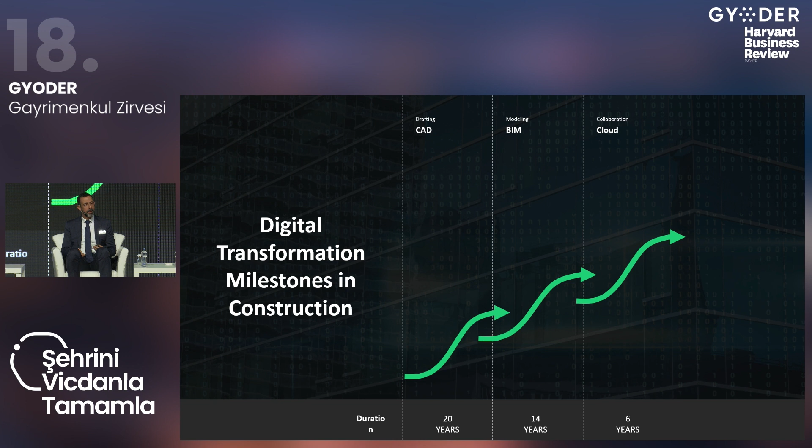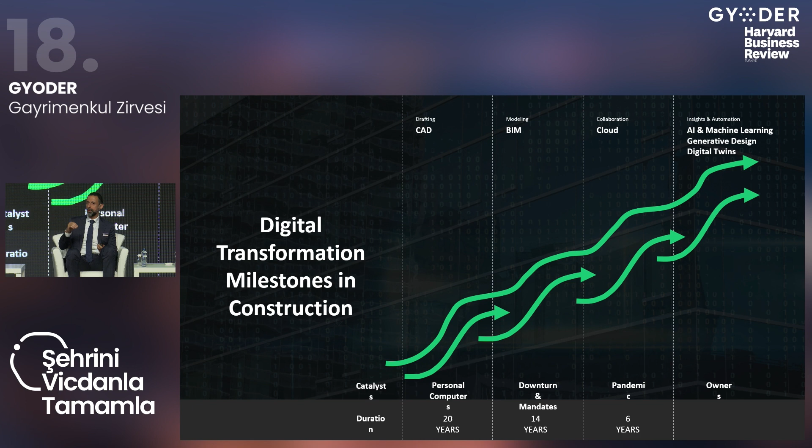And finally here, what we're seeing now is what I call the age of insight. So we generate a lot of information, but how can we do better decision-making from that information that we generate, right? And throughout the process, we've gained incrementally more benefit. And each phase had its own catalyst. So the move to CAD was facilitated by personal computers. Move to BIM was the 2008 downturn and then the BIM mandates. Funny enough, the pandemic accelerated the use of cloud, and now owners are demanding better insight based on data that they have from the design process.

So they warned me against doing that, by the way.

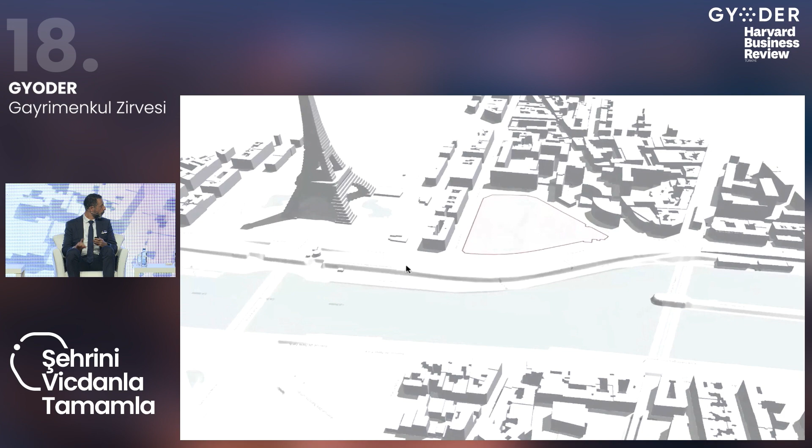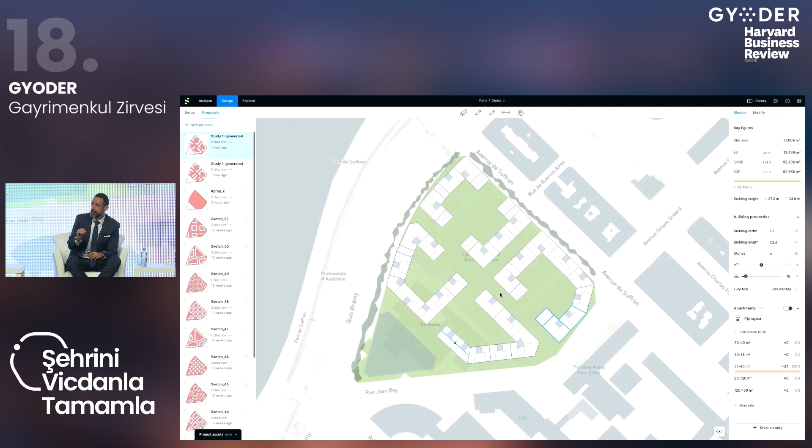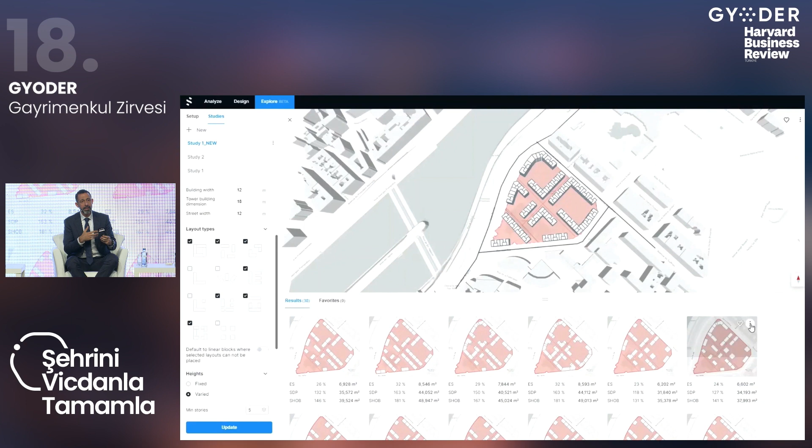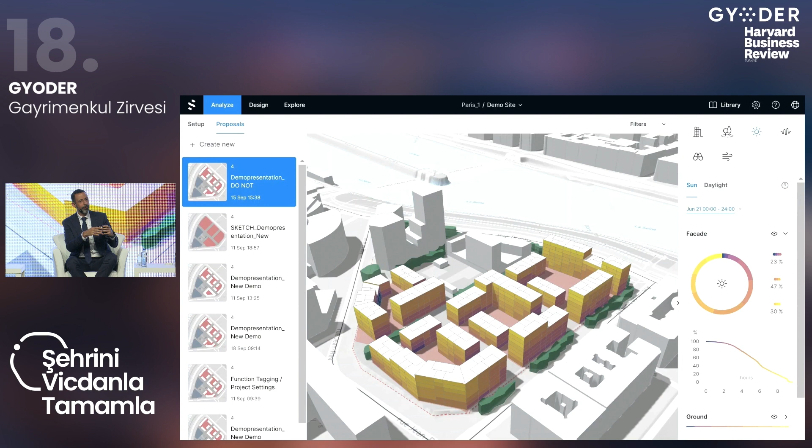One button. So what you see behind me is insight, right? What you see behind me is an algorithm looking at a plot of land and evaluating that plot of land for things like the number of units, the rentable areas, the green areas within that community, and it all happens in context. So in this example, this is a real plot of land next to the Eiffel Tower that is being evaluated. And instead of one person doing one analysis on one option, what you see is an algorithm giving you tens of thousands of options in virtually no time, right?

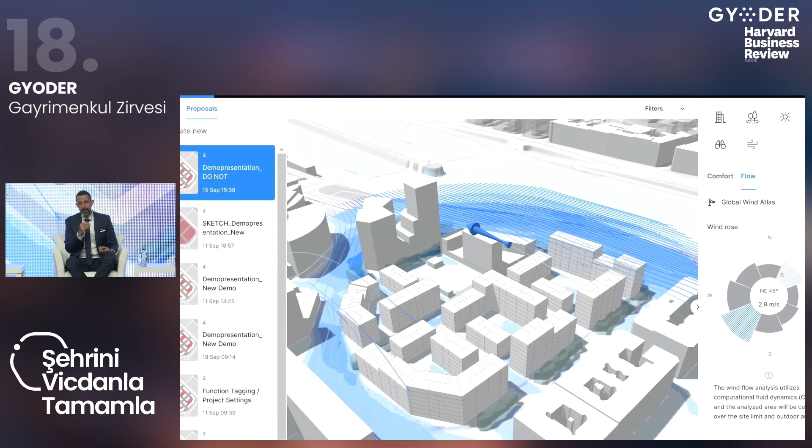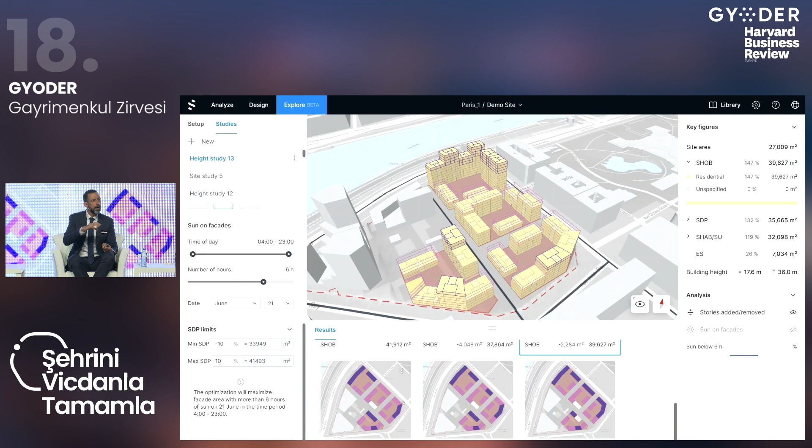Those algorithms are now loaded with things like artificial intelligence, predictive analytics that can intuit results. So instead of doing a computational fluid dynamics simulation of how the wind flows, that algorithm can actually give you a very good first guess and take you directly into that decision-making mode. So this is the age of insight. This is not common practice across the industry now, but this is what you can expect to see happening in the next few years. We see some adoption, but it's certainly not the norm.

This is the norm. It's digital project delivery. In this case, I'm talking about Red Sea Global. So if you read a bit about the construction industry, the single largest construction opportunity now is happening in Saudi through the Public Investment Fund projects. Red Sea is one of the projects that are being managed there. This is a $16 billion project over an area the size of Belgium, right?

Massive, massive development. What's interesting about this real estate owner is that they said, I want to own the data from the beginning, not just the assets. So everyone in their ecosystem actually goes to their environment through the cloud. They do the modeling in their own environment, and they get out at the end of the day, which means that someone like Red Sea retains that knowledge, retains that information.

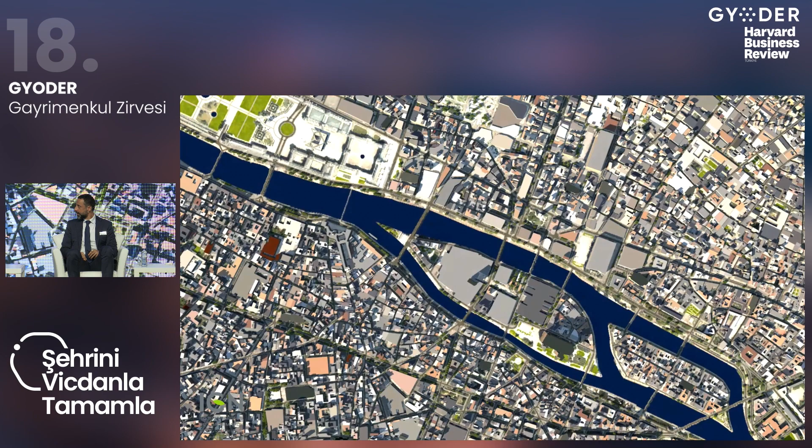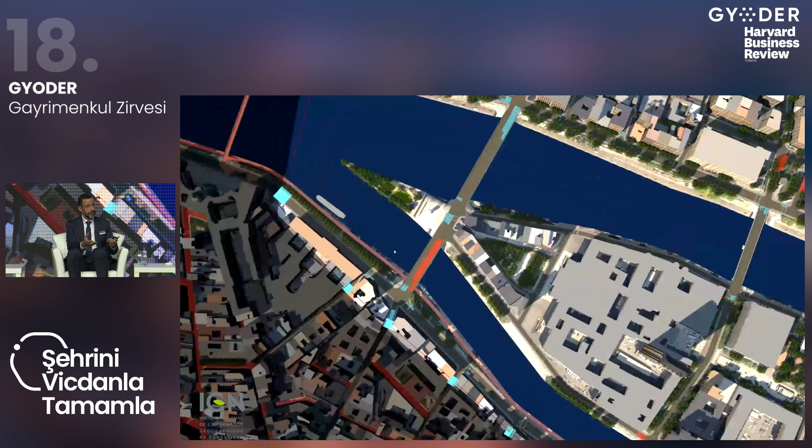And I want to close with just a quick video going back to Paris. We work a lot with the city of Paris. This is a simulation that is being run citywide. So now insight is not just on a certain building or a certain community. It is citywide. What you can see is a traffic simulation with real-time data coming from sensors into this model that can actually look at where bottlenecks in the system are and advise the designers to take corrective action. That corrective action can be diverting a certain traffic route, or it could be on the next construction project doing something differently to cater for that environment.

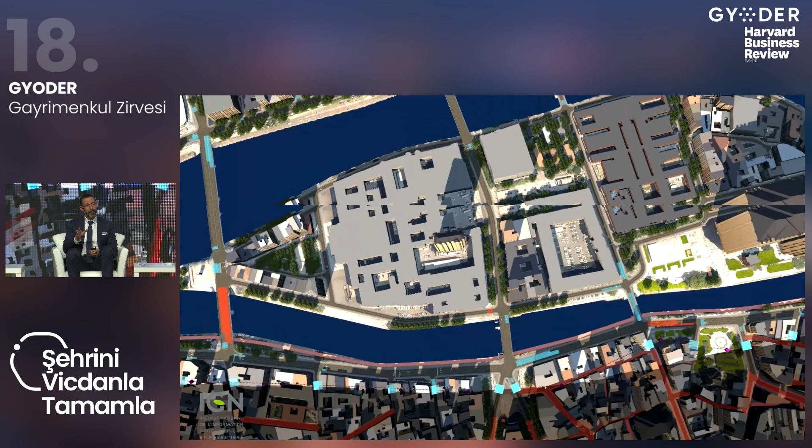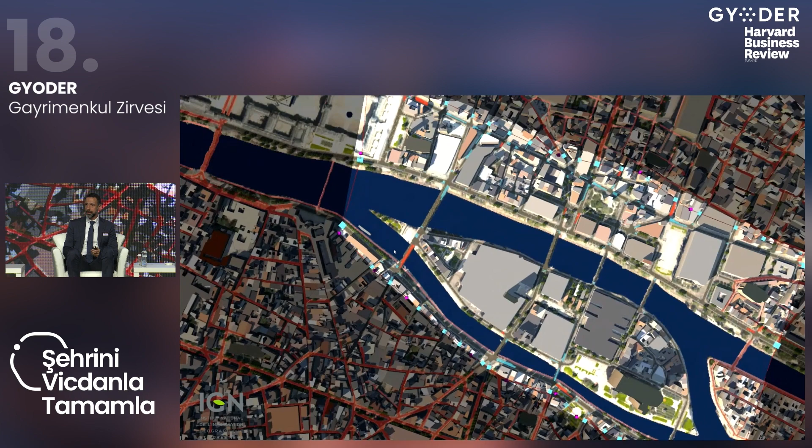So I just wanted to give you a brief overview of where things are in digital transformation now in the industry. And there's a lot of talent here. I've seen it with flagship projects like Istanbul Grand Airport, like Metro Istanbul, which are quite advanced at a worldwide level. You do have a lot of excellence in Turkey, and it has always been a pleasure dealing with those projects. And again, we do have a large contingent of very talented people in Turkey. Any way we can help you digitally transform, please do let us know.

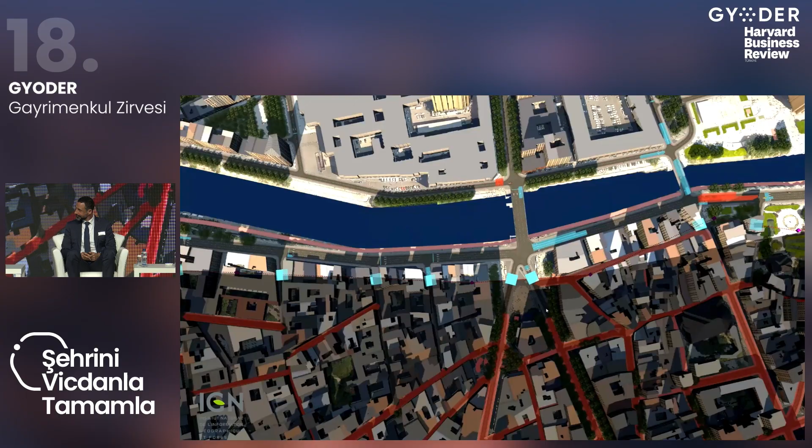Excellent. Naji, thank you very much. I think it's quite interesting to see that sometimes we're maybe too pessimistic and say, oh, we could be much further down the line in digital transformation. But what you're showing us is that a lot is available already, and maybe it lacks a little bit of awareness and hence adoption. And there's a lot of work done as we speak on many fronts in the industry, for sure.

And so I want to come to Bernhard. You represent Progress Group, or Green Code to be precise, which is part of Progress Group. You're in modular construction. You've got a lot of experience in BIM, but you'll probably talk more about the angle of actually realizing what is being designed.

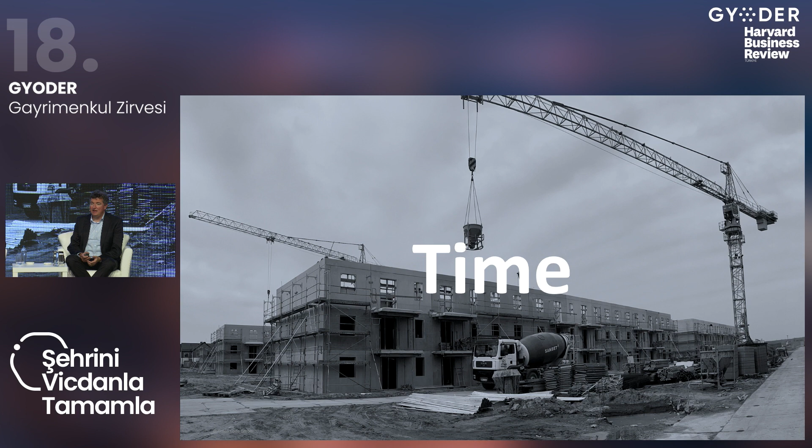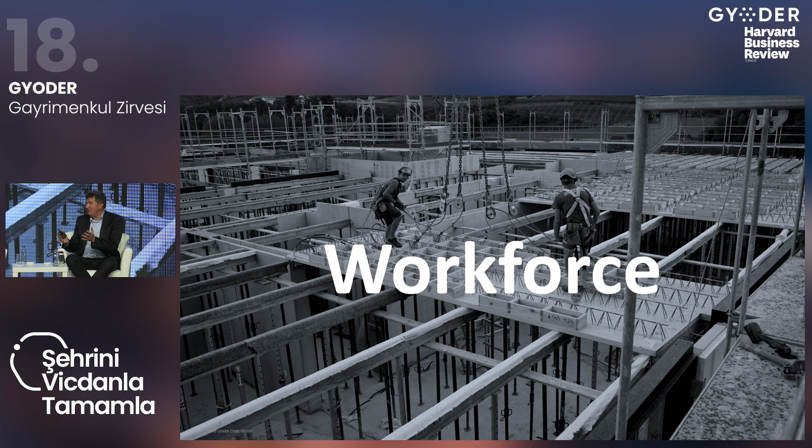But the next issue that the industry is facing is capital. Everything needs to be cheaper. It needs to be more effective, more productive, and it needs to be realized in a shorter time span. This is the challenge that we are facing. And last but not least, here in Turkey you still have a lot of workforce, but in the rest of the world, especially in Europe, we do have a huge issue with the available workforce.

And the ecology is something which comes from that, the sustainability. It's something that we've already heard today: we need to sustain and have a building system which sustains us into the future. And therefore, I try to answer these questions a little bit in the next couple of slides and how this is possible.

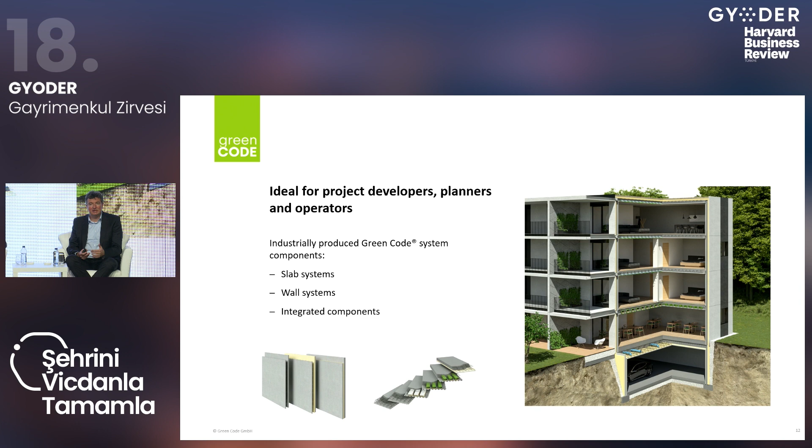But as I've already told you before, it's produced automatically in automated production facilities. Here is a short example of an automated production facility. This facility is in France, where a very few workers are actually creating thousands of square meters of finished product every day.

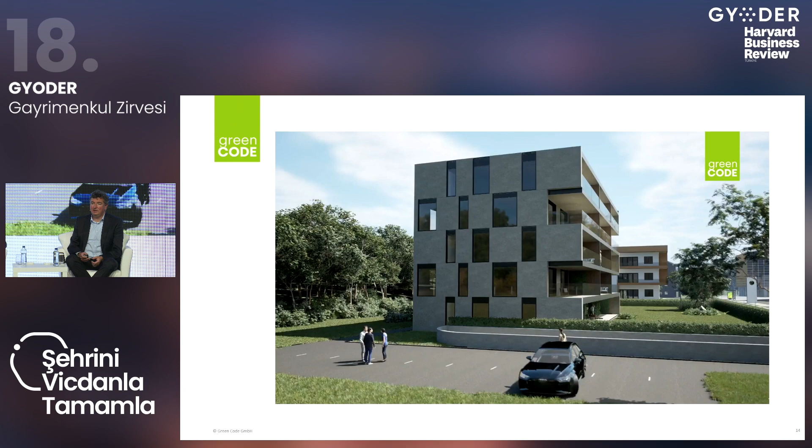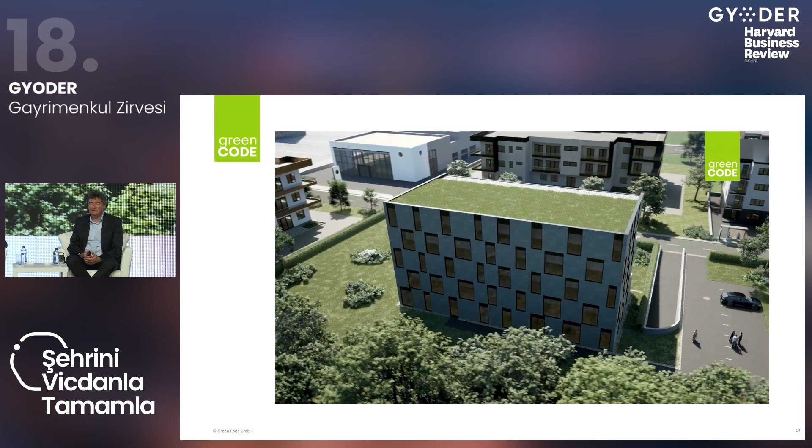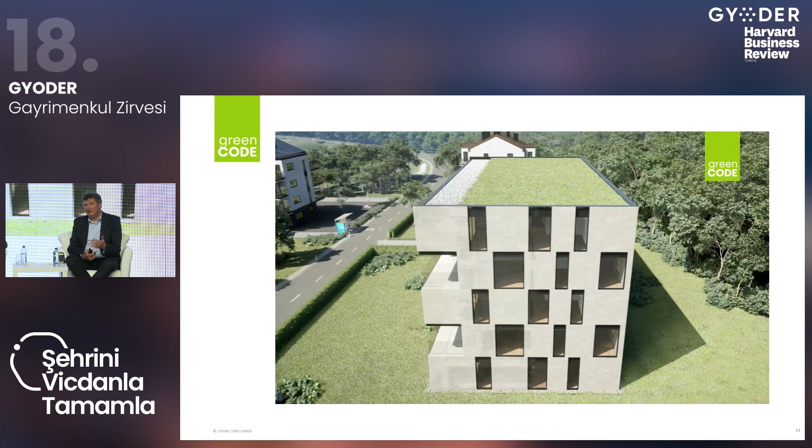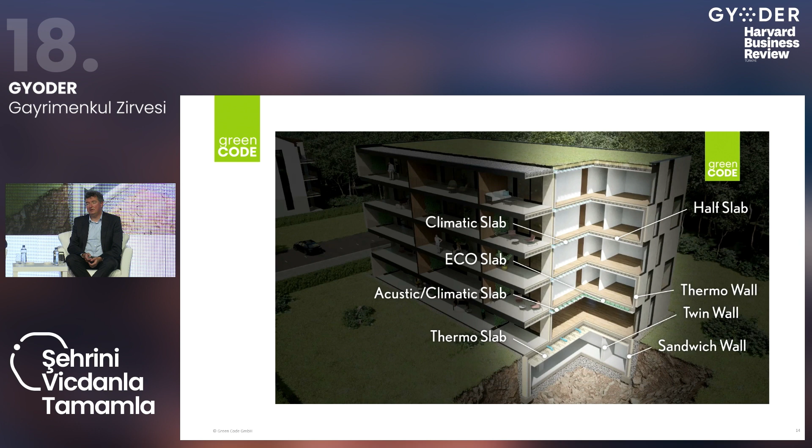So here is a short video which explains the building system a little bit better, where you see the different types of walls. We are hugely advocating green roofs to improve the overall thermal efficiency of our buildings, and then having highly insulated walls on the outside to reduce the amount of heating and cooling required, and then different kinds of slabbing solutions depending on the use of the building and the usage of the part.

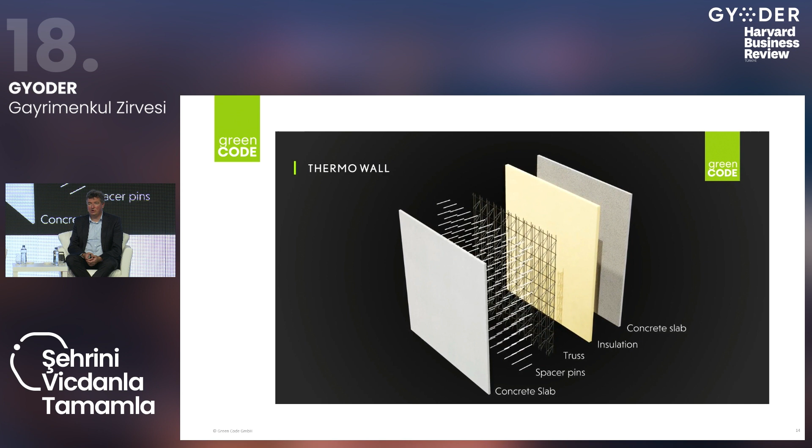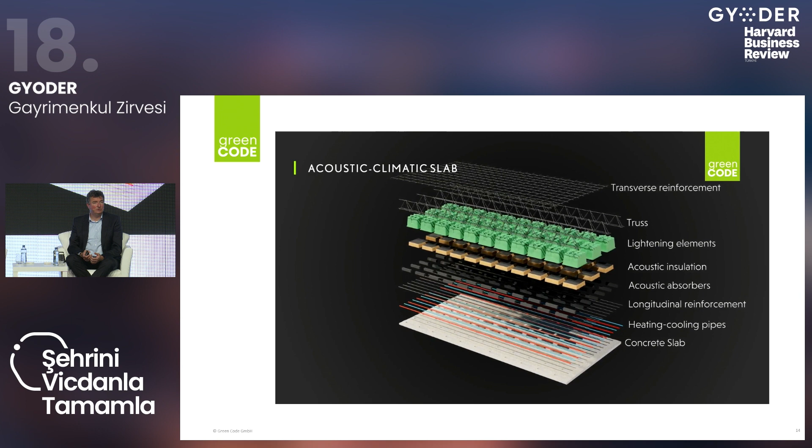Here you see an example of an insulated walling panel, which is automatically produced in a factory. In an explosion view here, you see the insulation part and the two concrete slabs, which are working together. And then with the infill concrete, you're creating a monolithic building system. And here is the same thing for a slabbing solution, where you have the acoustic optimization and heating and cooling directly integrated into the slab. So this was just a very short technical outlook on what we're doing here.

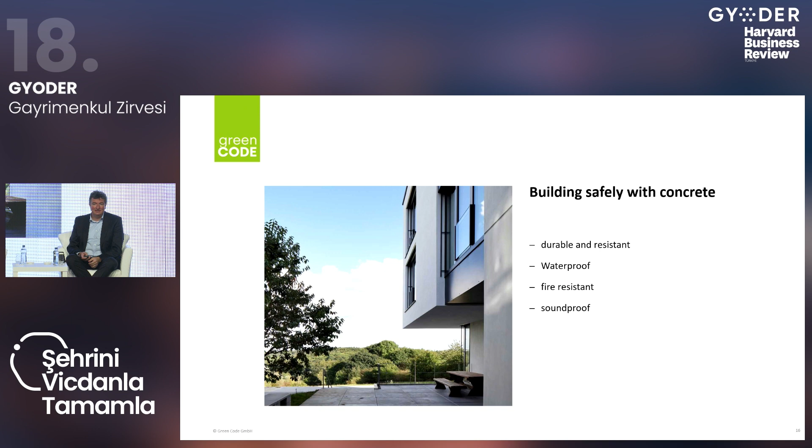I want to show a few more examples, because here you can get a look and feel of what is possible with the solution. Here we see a hotel building in Bad Gastein. They just opened this building, so I still have some pictures from the construction site. But it's important that this was also on a fault line. It's not the same fault line as in Turkey, but still it is in a seismically active area, and they used the system. And why did they use the system? It's just because of the rigidity.

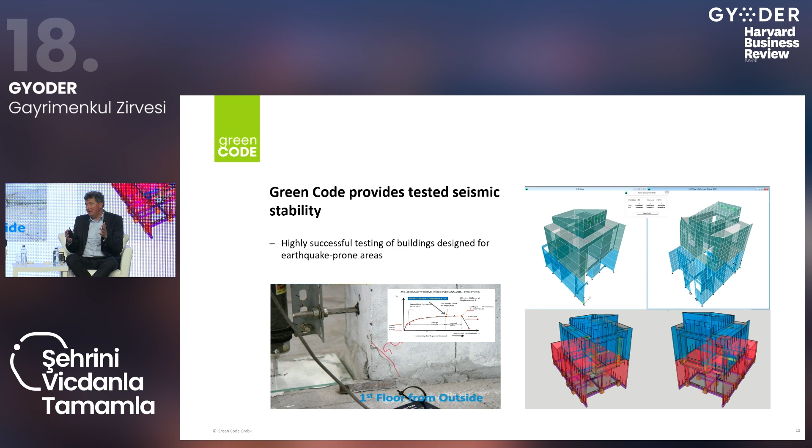Here we did a test with the University of Milano, just to make sure that this system has structural soundness and can be used for seismic stability. It's very rigid. Through this being a monolithic building system, it is very, very rigid in total. And what you can see here is the deformation of the building, the actual building that we've seen before; it can be quite active, and through the monolithic core, it can deform and stay quite in shape.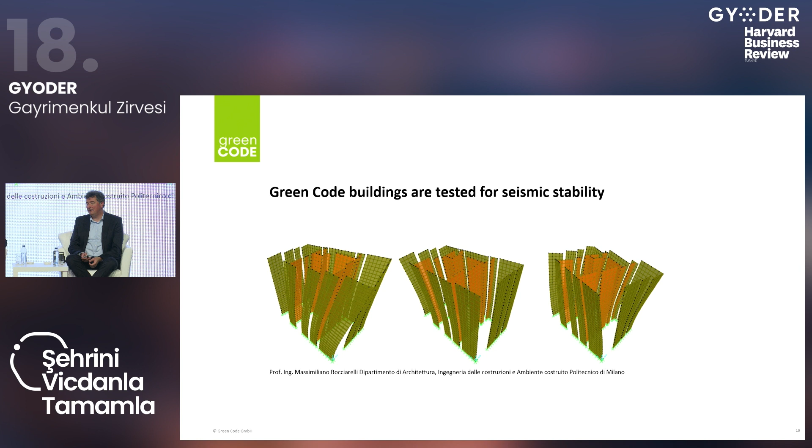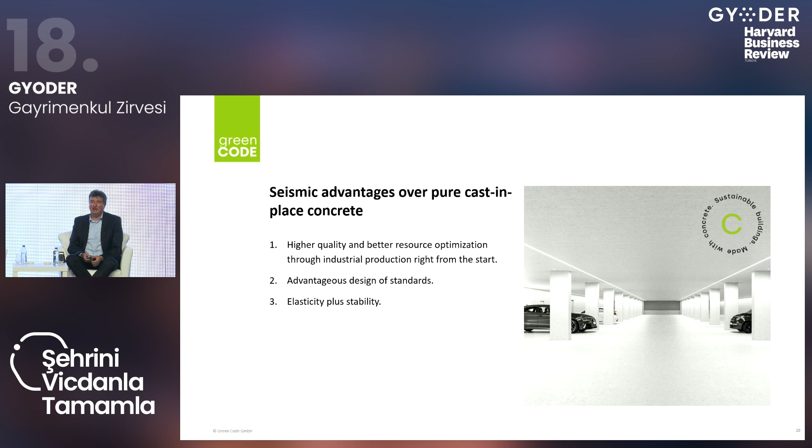This is just to demonstrate that even in seismically active zones, this system can be used quite easily. Therefore, it has been adopted also in China. A lot of the active zones in China are actually using this type of building system more and more. And you have the standardized quality, you have the advantages of design standards, of being able to create anything that you can envision in an automated and industrial way.

And it has to be cost effective. If it's not cost effective, then it's never going to be adopted by any region in the world. And how can we say that it's cost effective? It is that you can reduce the time span on site.

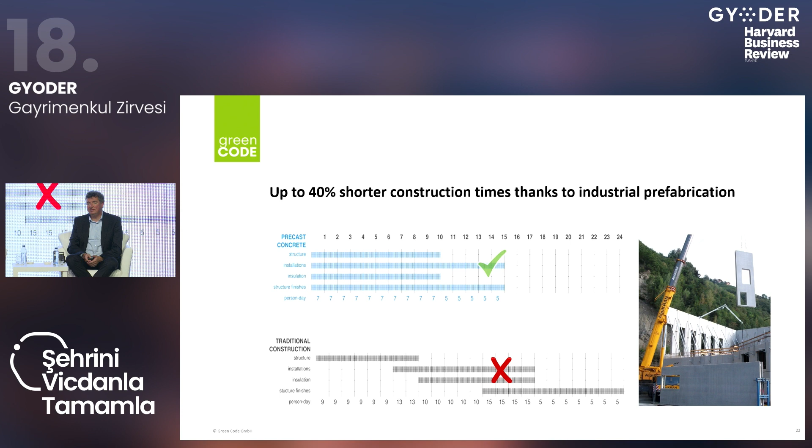This is a short graph which demonstrates the difference between traditional concrete, on the bottom, and precast concrete or the Green Code system on the top. And how can you save time on site? It's by integrating different building services, which in regular construction happen in sequence on site. They are put into the factory here, and therefore you can shorten the construction time on site by 40%.

Here we see a short example of Poland. Poland has become one of the major markets for the prefabricated system. It's just because they also have a history of building prefabricated, and they have now a boom in the housing sector since their economy is booming, and they are just building and building new projects on and on.

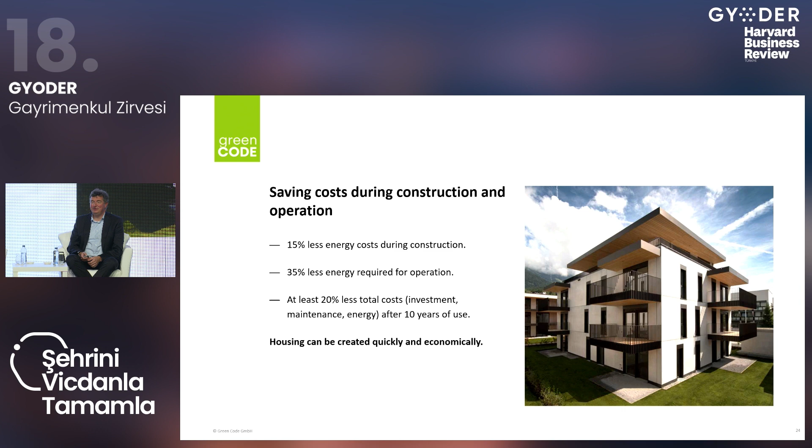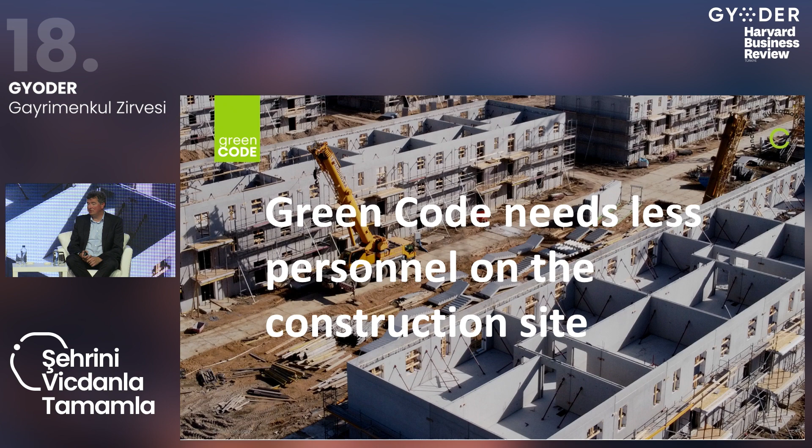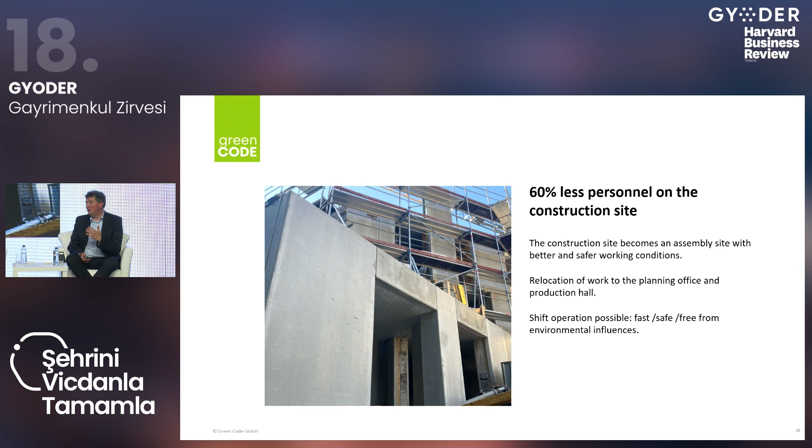effective. And furthermore, during the erection sequence, it needs a lot less people on site. It's something that I said at the beginning. In Europe, we are facing a major shortage of qualified labor, and therefore we can reduce the personnel on site by more than 60% while adopting this system and going into this direction. It gets a lot quicker on site, and I need less skilled labor on site. This is just the important part.

And I think the term sustainability and workability is something that we really all try to achieve, and having a better opportunity for all of us. And by putting the production into a safe environment, into a factory, you can have a lot more quality, and also quality for the workers. It's not that they have to work on site.

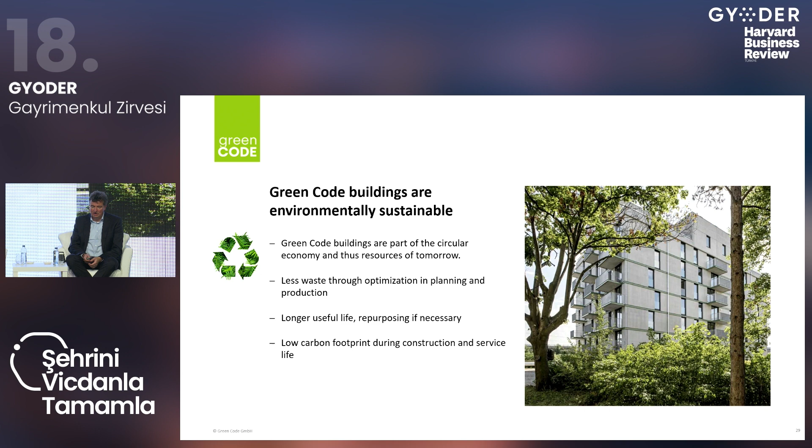And therefore, we are hugely promoting the sustainability of all of our buildings, because you have less waste on site, you have a longer use of the building, and over the 80 years that concrete buildings are usually designed for in Europe, you have a lower carbon footprint than other buildings. And they are socially sustainable, meaning that you can build affordable housing space with it, and I think affordability is something we all strive for, and through having the ceiling activated, you actually have excellent indoor climate. It's something that you really have to feel and live in.

Here is a short example how this works. So the ceiling is actually activated, so you have tubes going through the ceiling, and in the summertime you run cold water, in wintertime you run warm water through it, and you actually only have to have 18 or 17 degree cold water, so you don't need a lot of energy to cool the building, but you're actually drastically cooling the building.

It's not the same thing as an AC. It will never be the same thing as when you go into your car, you start the AC, and you have the cold wind blowing into you. This is more a tempering of the building. It is similar to when you go on a hot day into a cold cave where everything around you is cold, and you just feel very comfortable in it.

At the end of the day, this building system and this way of building buildings has been realized in thousands of projects all over Europe, from Spain to Poland. This is where the technology currently is reaching, and now we're looking into different markets and looking into things that can be achieved also outside of Europe.

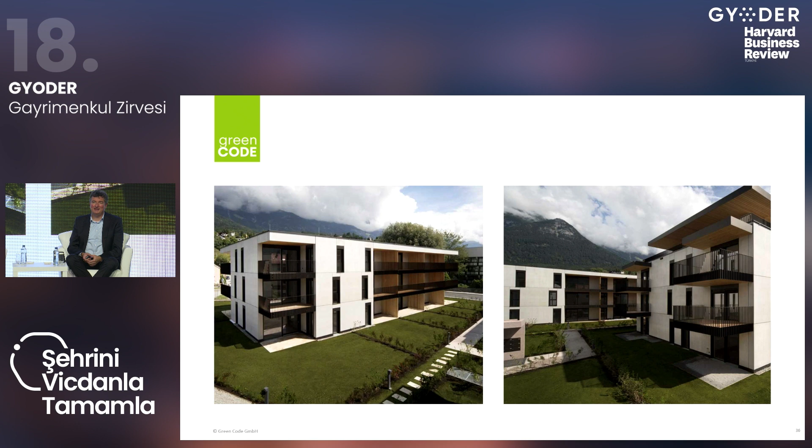And then you see different solutions here in the northern part of Austria, with residential buildings creating livable, affordable living spaces at affordable prices, and then a little bit higher class living space for medium income families, and then high-end living space here in Italy, also in Bolzano in Italy.

Thank you, Bernhard. You know, listening to the both of you, what strikes me is that the combination just looks like a great combination. And, having in mind that this country, the earthquake zone, needs maybe 700,000 housing units as soon as possible. But the rest of the country needs anywhere between 4 and 5 million housing units.

Affordable housing is a big topic, obviously, as in most other countries around the world. But this shows me it doesn't have to be boring; it can be cost efficient, and it can be very quick. And you need a lot less workforce actually in the design office, in the production facility or on site, which doesn't mean it will take away jobs. It will just mean that you can do more at the same time, especially when you're in a situation where you need to basically build a huge amount in a very short period of time.